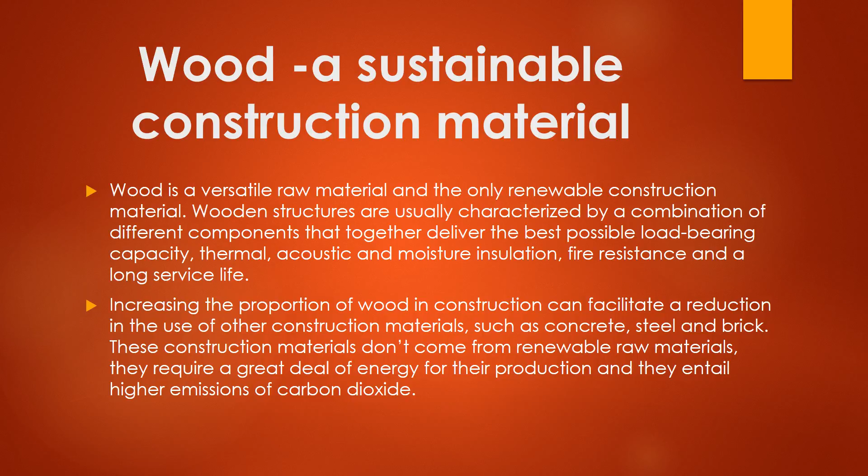Increasing the proportion of wood in construction can facilitate a reduction in the use of other construction materials such as concrete, steel, and brick. These construction materials don't come from renewable raw materials. They require a great deal of energy for their production, and they entail higher emissions of carbon dioxide.

Production of different construction materials. Manufacturing wood products requires the input of very little external energy over and above the energy from their own byproducts. 80% of the energy consumed by Sweden's sawmills derives from biofuels from their own production lines, such as bark and shavings, while 20% is electrical energy.

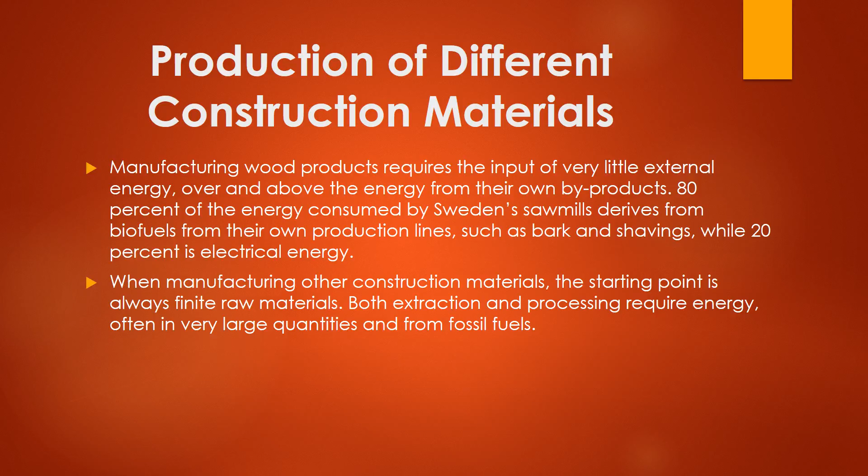When manufacturing other construction materials, the starting point is always finite raw materials. Both extraction and processing require energy, often in very large quantities and from fossil fuels. The manufacture of cement generates substantial carbon emissions, as do the processes for making steel. All the construction materials produced by these processes therefore have a positive carbon footprint.

This measure of a product's or activity's emissions of carbon dioxide and other greenhouse gases helps the user to opt for the alternative with the lowest impact on the climate. Wood is carbon negative since carbon dioxide is stored in the original wood, and the emissions associated with harvesting, transport, and processing are still small compared to the quantity of the stored carbon dioxide. And here's also a diagram showing the difference in the various materials.

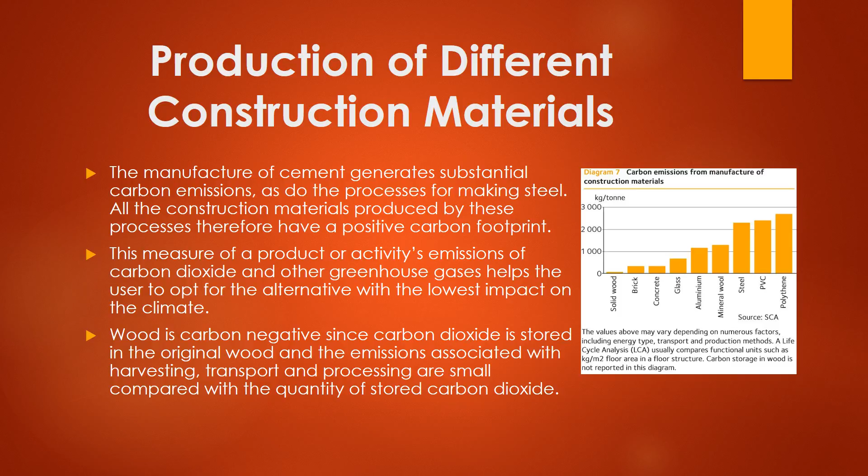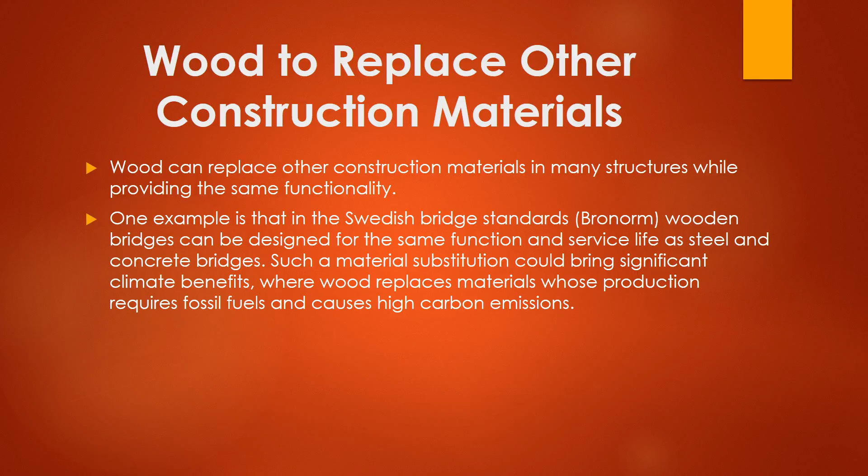Wood to replace other construction materials. Wood can replace other construction materials in many structures while providing the same functionality. One example is that in the Swedish bridge standards, Bronorm, wooden bridges can be designed for the same function and service life as steel and concrete bridges. Such a material substitution could bring significant climate benefits where wood replaces materials whose production requires fossil fuels and causes high carbon emissions.

Environmentally efficient life cycle and ecocycle. All construction materials except wood have a single ecocycle that involves reuse. For wood, there are two ecocycles, a shorter one that reuses the component or material, and a longer one that reuses the constituent parts of the wood material via nature's ecocycle.

We see examples of the shorter ecocycle in the construction industry and in distribution and packaging. Windows, doors, and timber can be reused, as can pallets, packaging, and cable drums. In all cases, there is an organization to deal with the products and find new users.

Once wood can no longer be reused or its material recovered for use in fiberboard and other sheet materials, for example, it can still generate energy through incineration. The energy is climate neutral and is in fact stored solar energy.

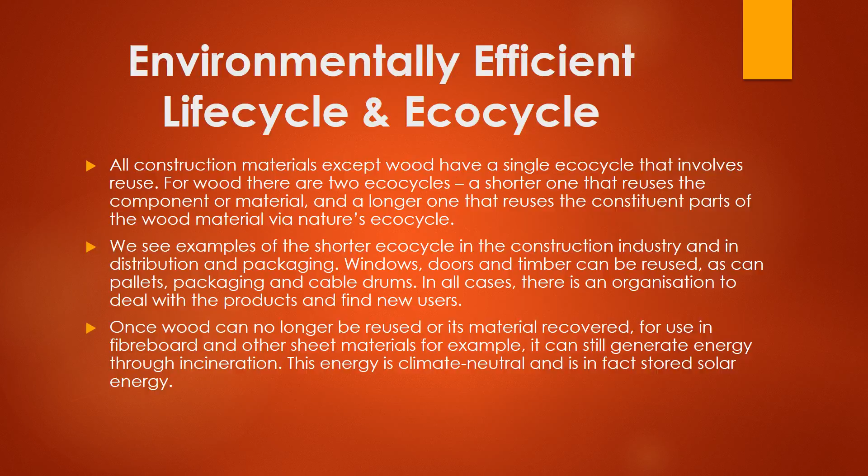Building with wood, it's positive for the climate. Achieving a climate neutral society depends on greater energy efficiency and a wider use of renewable energy sources. For the construction and real estate sector, this will have an impact on both the production and use phase. For new builds, this is about the choice of materials and having a construction process with a low environmental impact and an energy efficient building at the end of it.

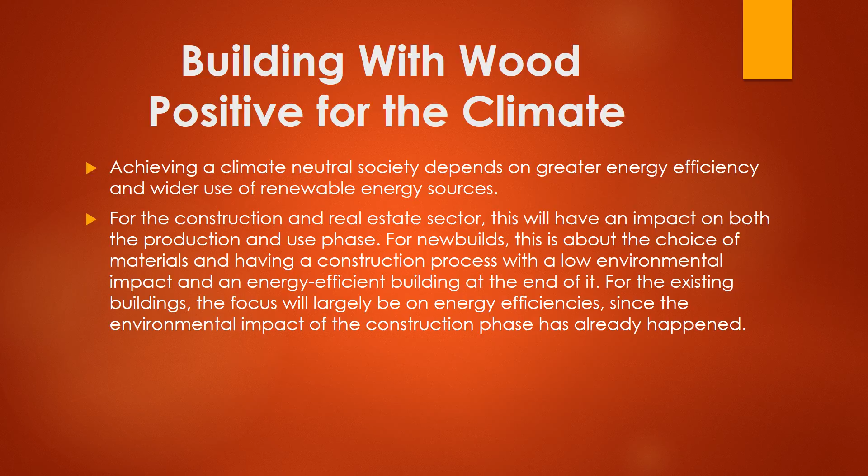For existing buildings, the focus will largely be on energy efficiency, since the environmental impact of the construction phase has already happened. Historically, a building's operational phase has accounted for the greatest energy consumption during the building's lifetime, and the production phase has been seen as almost negligible.

With the advent of new, increasingly stricter requirements concerning energy use in our buildings, and in an extreme case, zero energy buildings, energy use in the production phase will become increasingly important. Adapting material choices, designs, and production processes to the new conditions is a major challenge for the construction sector. Greater use of wood-based products and wooden structures is a significant part of the solution due to the material's carbon storage and substitution effects.

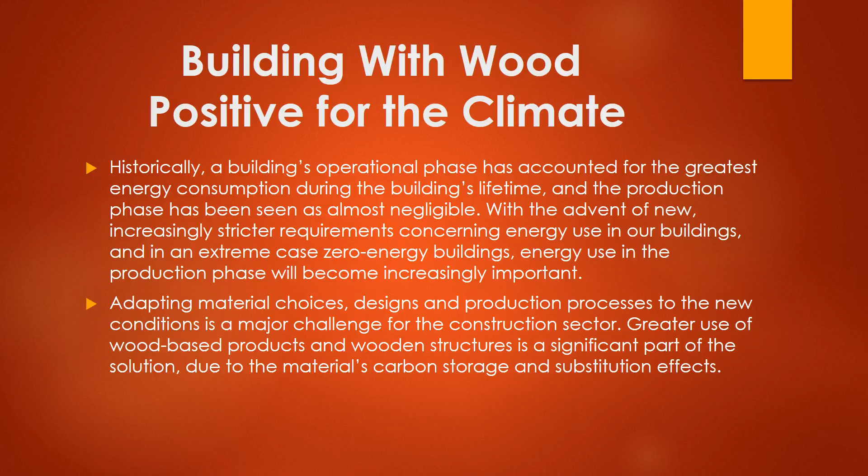Standards and environmental product declarations. New standards and documents are currently being drawn up as a means of assessing a building's environmental impact. The basis for all standards on the environment is ISO 9001 and ISO 14001. Then come the standards for life cycle analysis.

Product Category Rules, or PCR, set out how to draw up an environmental product declaration, and these are governed by SS-EN 15804 for building products. SS-EN 15978 specifies the calculation method based on a life cycle analysis that is used to assess the environmental performance of the whole building.

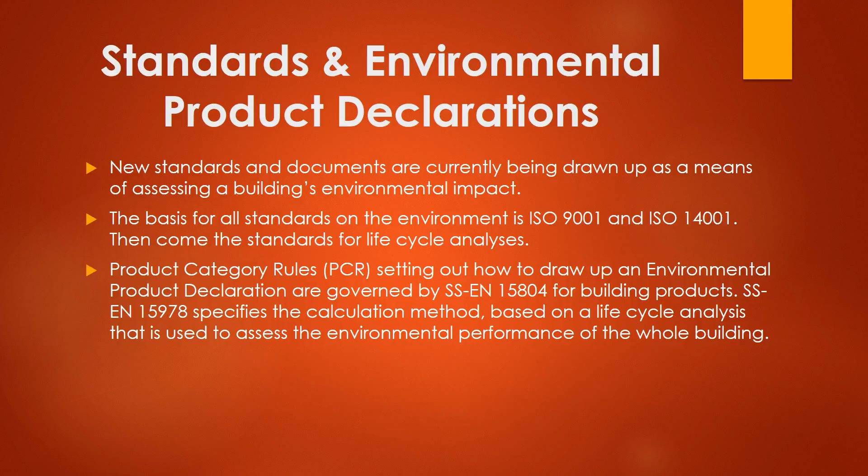Now we will talk about tree growth. Trees grow in height as a result of the meristems that are located at the branch tips. All buds that you see on a tree contain apical meristems.

Trunk diameter growth occurs as a result of another meristem, already mentioned, called the vascular cambium. A tree grows upward from the tips of the branches, downward from the roots, and outward from the trunk. The root anchors the tree to the ground, and the trunk gives support to the branches.

As a tree grows from the food it manufactures, it adds new layers of wood to its trunk. Because one is formed each year, these layers are called annual rings and may be used to tell the age of a tree.

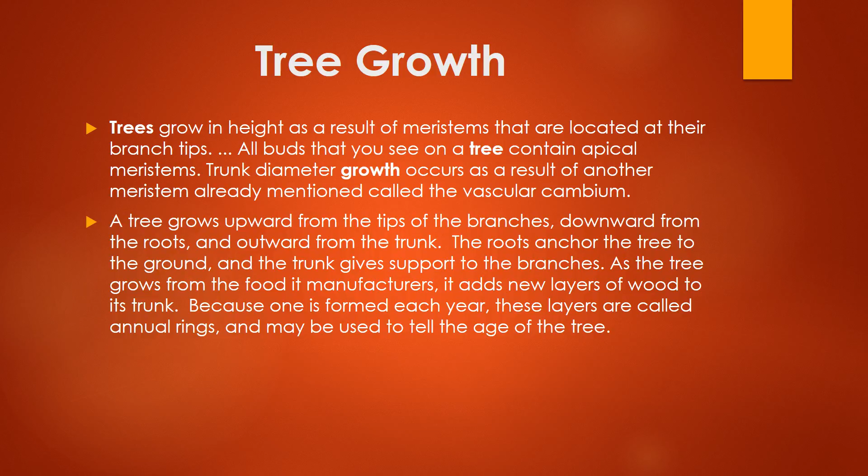The center of the stem is called the heartwood. This is composed of dead cells that give the tree strength to stand. The heartwood was once sapwood, but when new sapwood formed, the older died and formed the heartwood of the tree.

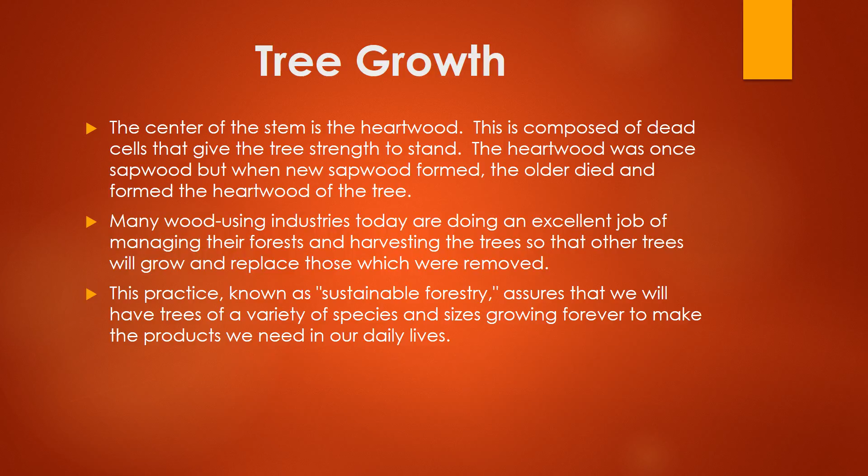Many wood-using industries today are doing an excellent job of managing their forests and harvesting the trees so that other trees will grow and replace those which were removed. This practice, known as sustainable forestry, assures that we will have trees of a variety of species and sizes growing forever to make these products we need in our daily lives.

Softwoods and hardwoods. All trees reproduce by producing seeds, but the seed structure varies. In general, hardwood comes from a deciduous tree which loses its leaves annually, and softwood comes from a conifer, which remains evergreen. Hardwoods tend to be slower growing and are therefore usually more dense. Hardwood is not necessarily a harder material, and softwood is not necessarily a softer material.

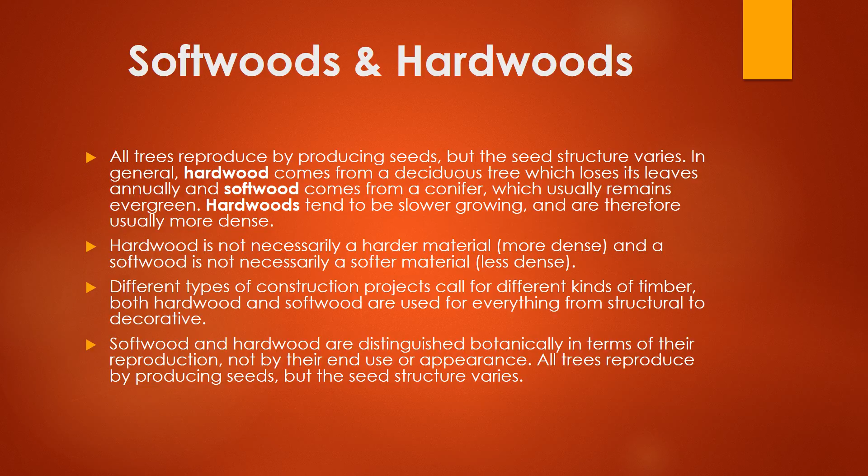Different types of construction projects call for different kinds of timber. Both hardwood and softwood are used for everything from structural to decorative. Softwood and hardwood are distinguished botanically in terms of their reproduction, not by their end use or appearance. All trees reproduce by producing seeds, but their seed structure varies.

Specifically, hardwood has vessel elements that transport water throughout the wood. Under a microscope, these elements appear as pores. Hardwood is more likely to be found in high-quality furniture, decks, flooring, and construction that needs to last. Types of hardwood are alder, balsa, beech, hickory, mahogany, maple, oak, teak, and walnut.

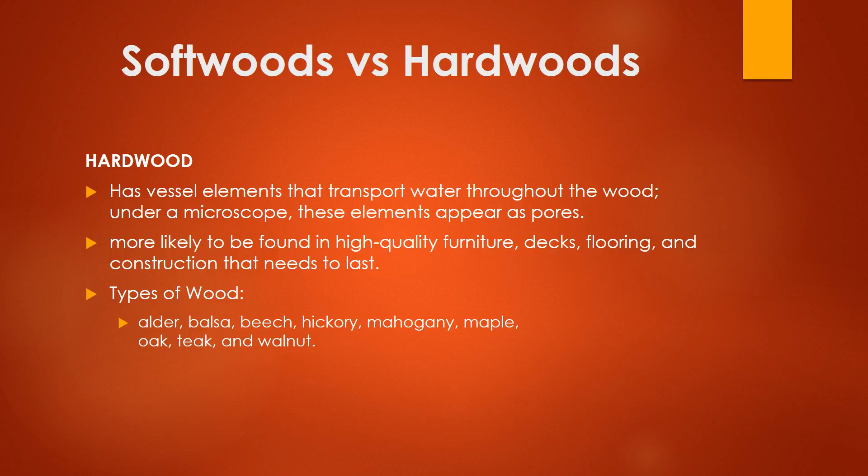More details on softwood. They usually have needles and cones. Medullary rays and tracheids transport water and produce sap. When viewed under a microscope, softwoods have no visible pores because of tracheids. About 80% of all timber comes from softwood.

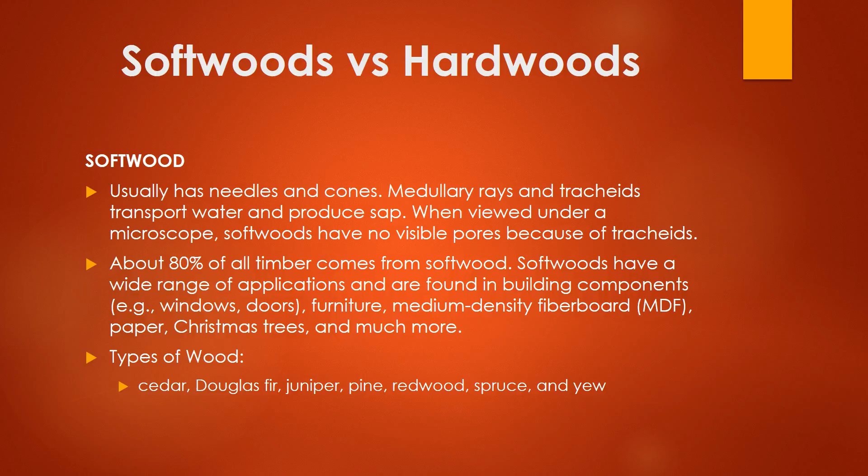Softwoods have a wide range of applications and are found in building components, for example, windows and doors, furniture, medium density fiberboard or MDF, paper, Christmas trees, and much more. Types of softwood are cedar, Douglas fir, juniper, pine, redwood, spruce, and yew.

Now we will talk about certified wood. Certified wood and paper products come from responsibly managed forests as defined by a particular standard. With third-party forest certification, an independent organization develops standards of good forest management, and independent auditors issue certificates to forest operations that comply with those standards.

Some certified wood requirements. Forest certification programs typically require that forest management practices conform to existing laws. Other basic requirements or characteristics of forest certification programs include the basic requirements of credible forest certification. Such items include protection of biodiversity, species at risk and wildlife habitat, sustainable harvest levels, protection of water quality, and prompt regeneration.

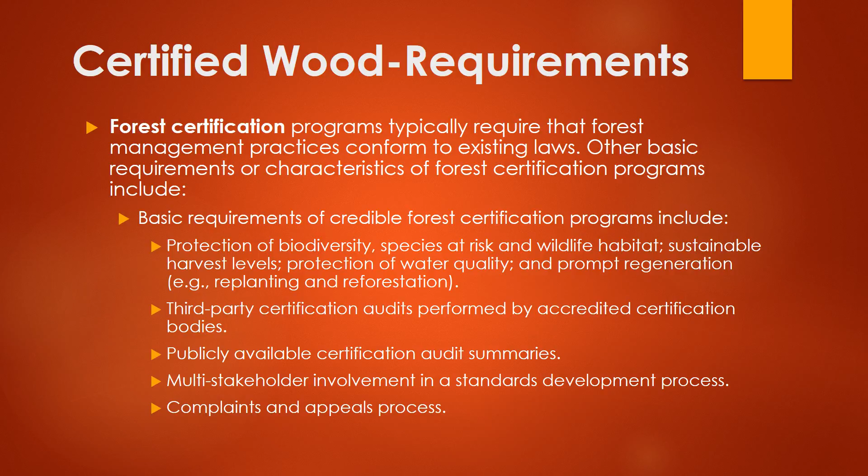There are third-party certification audits performed by accredited certification bodies, publicly available certification audit summaries, multi-stakeholder involvement in a standard development process, and there's also a complaints and appeal process.

Today, there are more than 50 certification programs worldwide addressing the many types of forest and tenures around the world. Two of the largest international forest certification programs are the Program for the Endorsement of Forest Certification, also known as PEFC. It is the largest certification framework in terms of forest area, with approximately two-thirds of the total certified area. And there's also the Forest Stewardship Council, or FSC, which is the fastest growing.

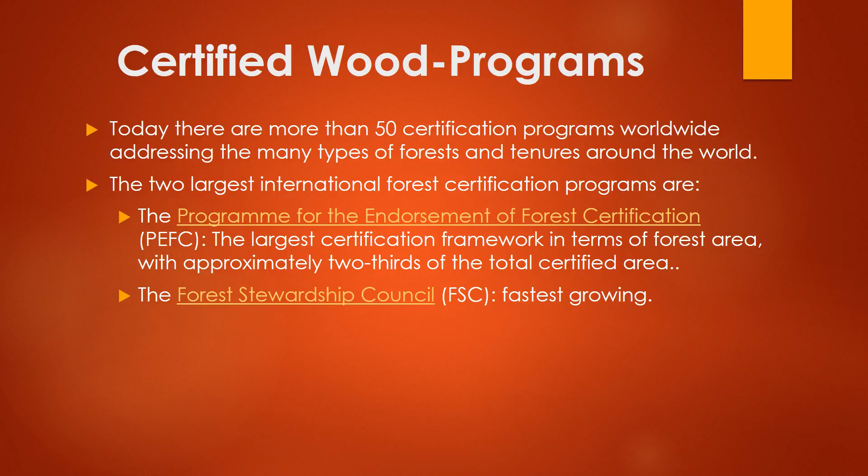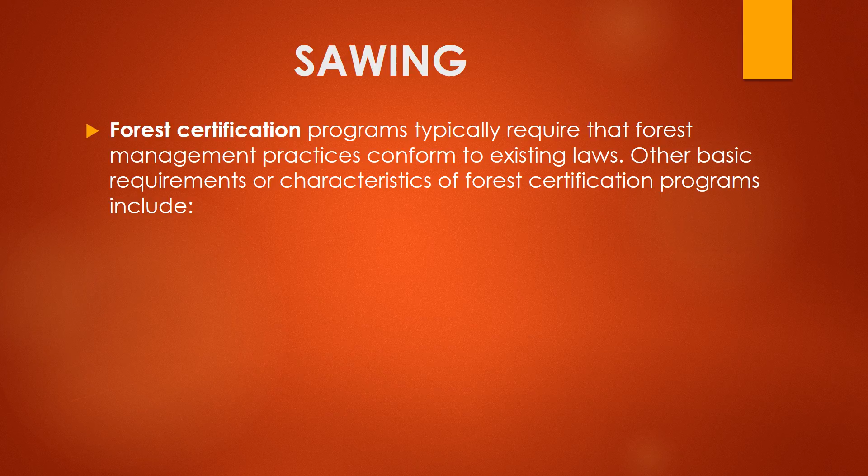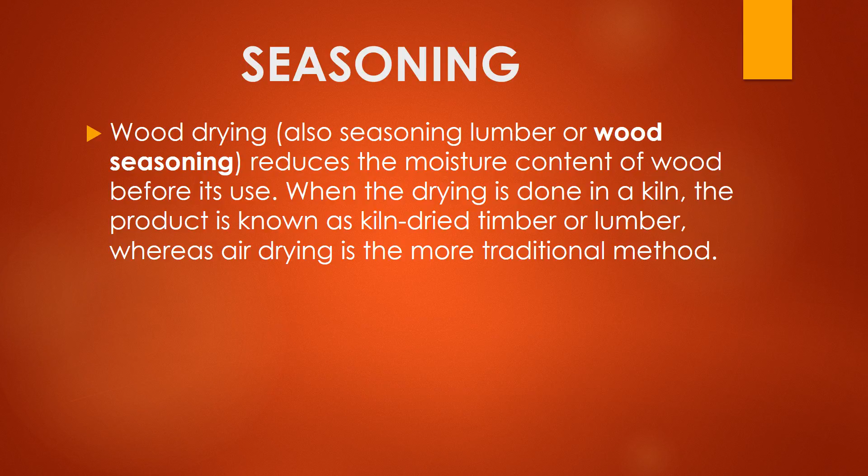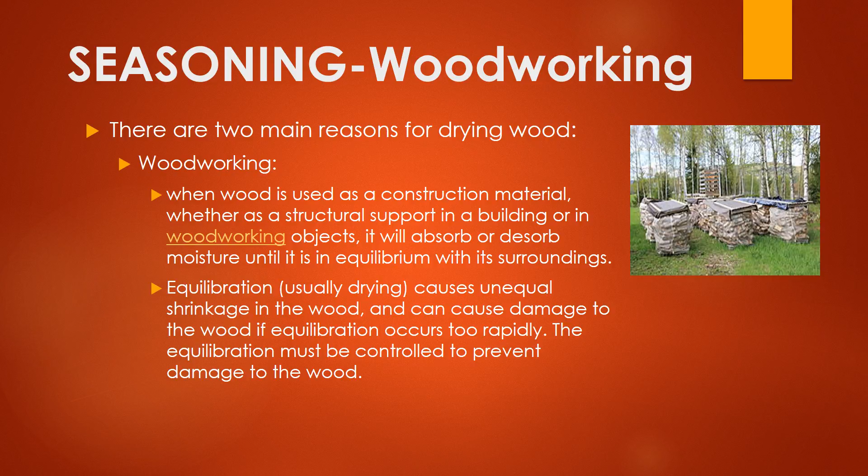Seasoning, when it is done in woodworking, there are two main reasons for drying wood. First is woodworking. When wood is used as a construction material, whether as a structural support in a building or in woodworking objects, it will absorb or desorb moisture until it is in equilibrium with its surroundings. Equilibration usually causes unequal shrinkage in the wood and can cause damage if equilibration occurs too rapidly. The process must be controlled to prevent damage to the wood.

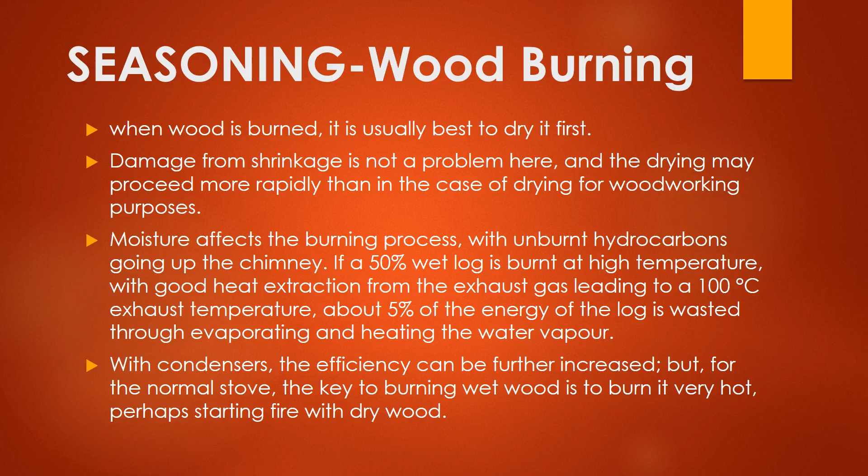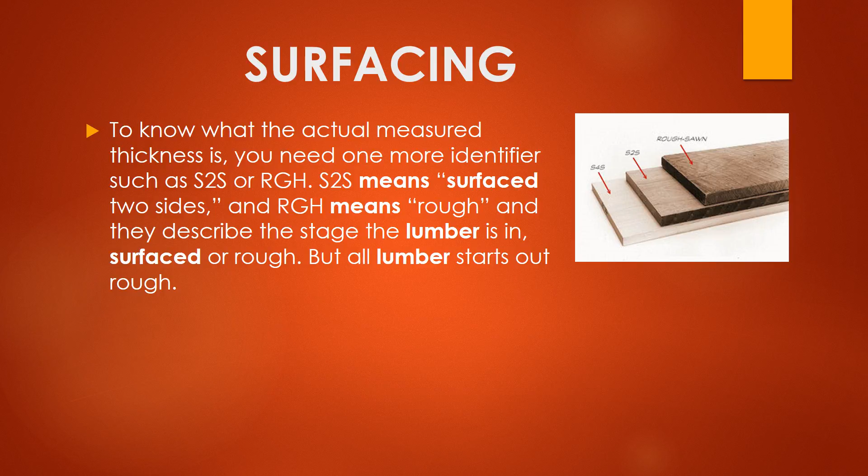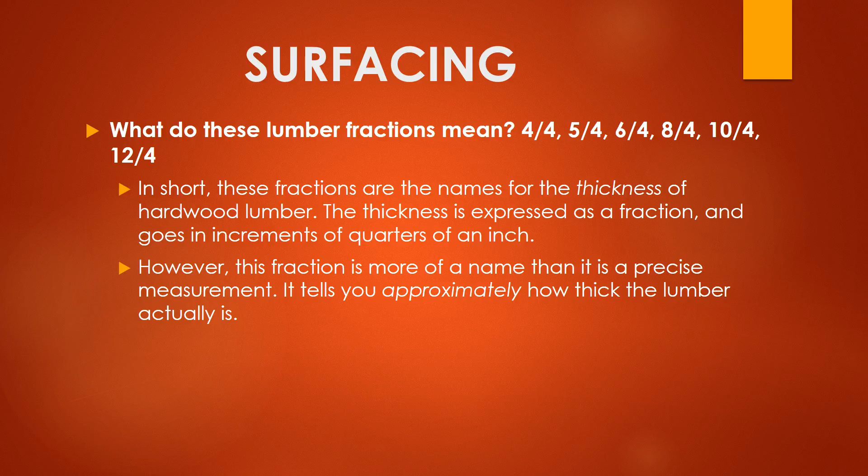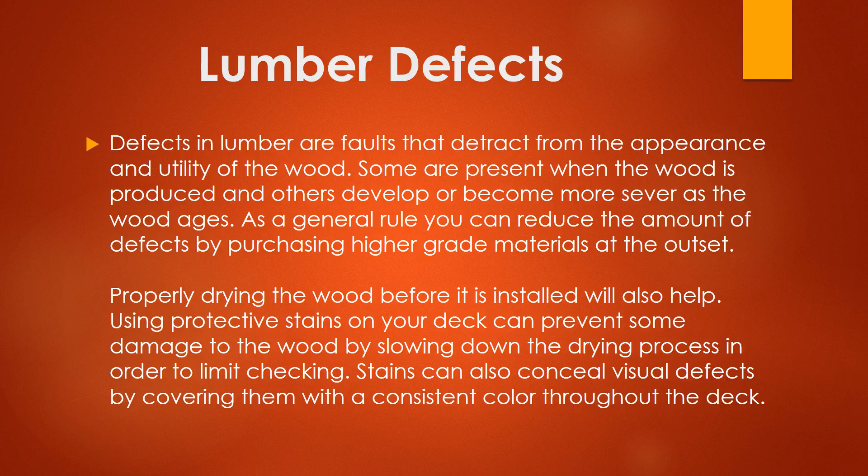Check: a check is a term used to describe a crack that runs through a board, usually lengthwise. It is usually caused when lumber dries too quickly. Adding a UV protective stain can help protect decking and rails. Checking often affects pressure-treated framing materials, as they are usually sold very green and put under a lot of stress as they dry out in the sun.

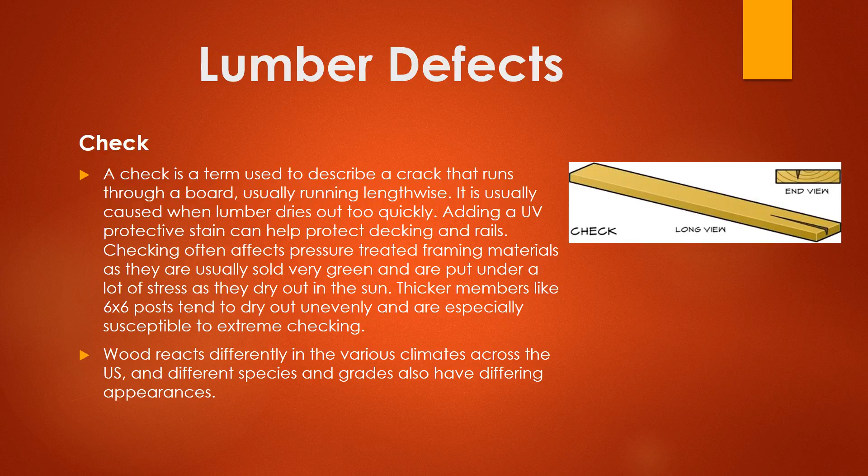Thicker members like 6x6 posts tend to dry out unevenly and are especially susceptible to extreme checking. Wood reacts differently in various climates across the U.S., and different species and grades also have differing appearances. Exterior environments have fluctuating moisture content in the air and materials; whether in a dry or wet climate, there will still be annual variation.

With a typically large cross-section of posts, commonly 4x4 or 6x6, the lumber does not dry uniformly. As the wood dries, it shrinks, and shrinking often causes existing cracks to open or twisting to occur. This is normal and structurally acceptable in most cases.

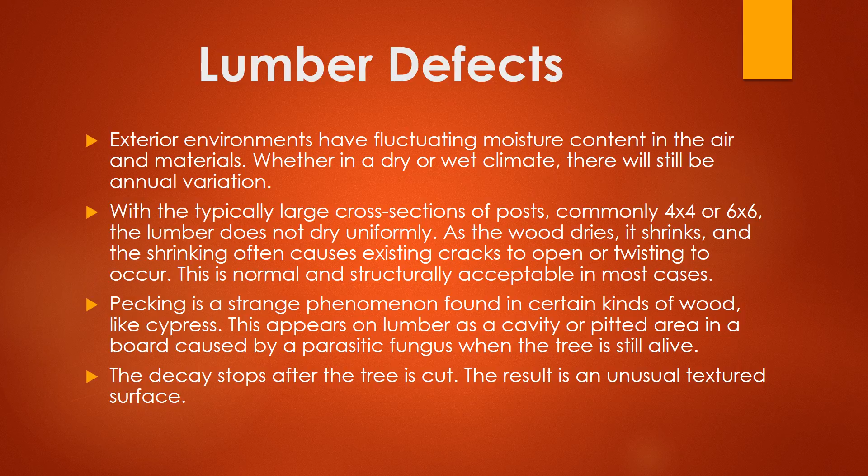Pecking is a strange phenomenon found in certain woods, like cypress. This appears on lumber as a cavity or pitted area in a board, caused by a parasitic fungus when the tree is still alive. The decay stops after the tree is cut, and the result is an unusual textured surface.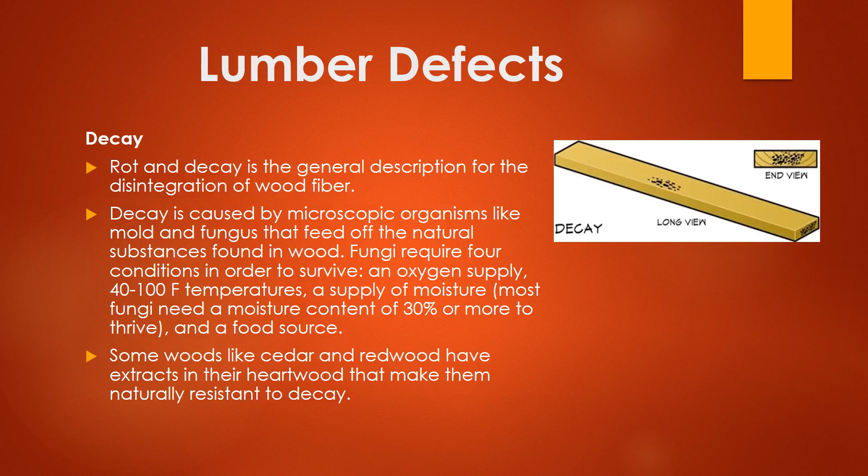A little more on decay: rot and decay is a general description for the disintegration of wood fiber. It's caused by microscopic organisms like mold and fungus that feed off natural substances found in wood. Fungi require four conditions to survive: an oxygen supply, 40 to 100 degree Fahrenheit temperatures, a supply of moisture — most fungi need moisture content of 30% or more to thrive — and a food source. Some woods, like cedar and redwood, have extracts in their heartwood that make them naturally resistant to decay.

We will talk more on shake now. Ring shake is caused by a parasitic bacteria that weakens the wood, resulting in cracking between and parallel to the tree's growth rings, and results in lower strength.

This is much like a large straw with a small straw inside of it. If it is stood upright, it can fall out of the bottom.

Ring shake can also cause a dark discoloration and unpleasant vinegar or rancid odor. This defect usually occurs in wood with high moisture content. It takes a long time for shake to spread, so it is usually found only in the lower part of the trees and can be cut out.

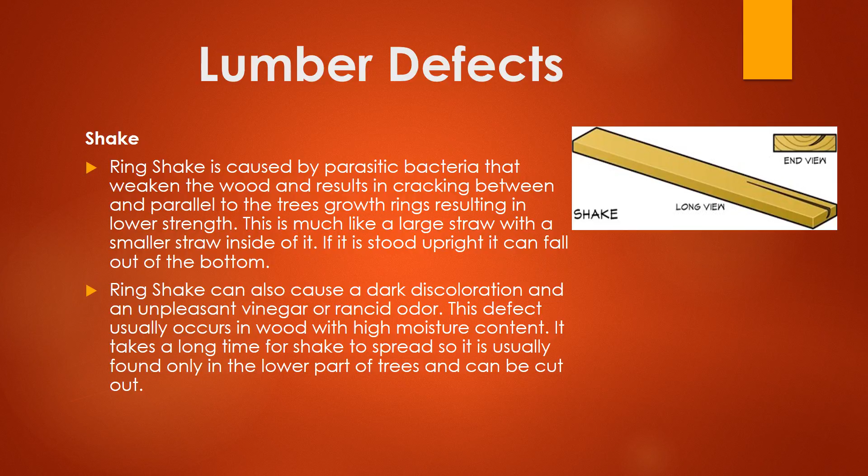Pitch pocket. These conditions are seen as a pocket of bleeding, resinous material found on a board and occur when a tree is injured. It sometimes happens when a feeding insect damages the living part of the bark. Resin or sap can stain lumber and may cause difficulty when applying finishes.

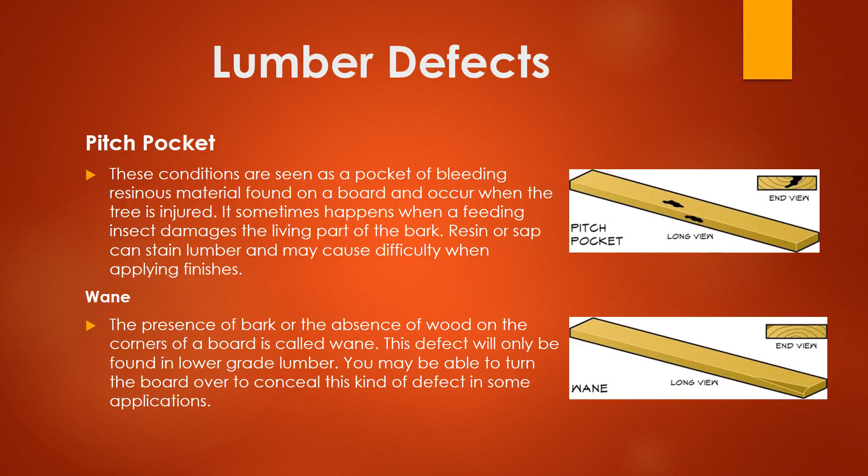Another defect is wane. This is the presence of bark or the absence of wood on the corners of a board. This defect will only be found in lower grade lumber. You may be able to turn the board over to conceal this kind of defect in some applications.

Another one is crook, or also known as crown, and it is a defect found in a board that is bent end to end in the direction of the tall ends of the board as it continues down the length of the board. It can occur from uneven drying or if the tree's pith, which is a soft core at the center of a tree, is at the edge of the board.

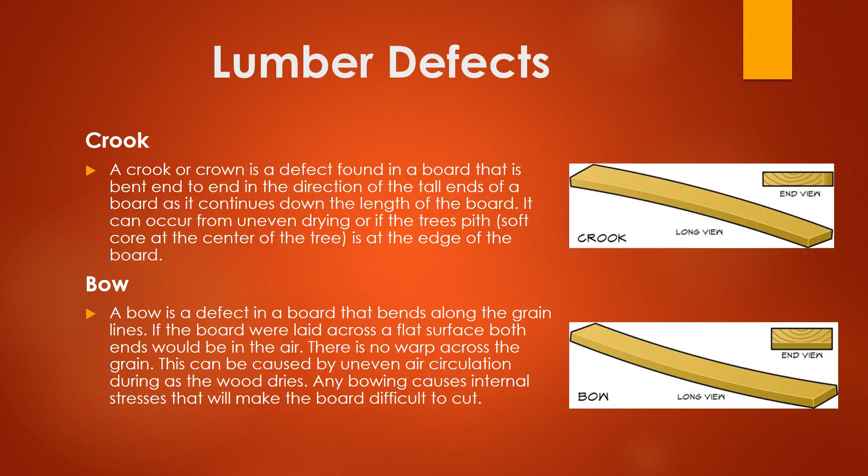Another defect is bow. A bow is a defect in the board that bends along the grain lines. If the board were laid across a flat surface with ends in it, both ends would be in the air. There is no warp across the grain. This can be caused by uneven air circulation as the wood dries. Any bowing causes internal stresses that will make the board difficult to cut.

Cup. Cupping occurs when the board bends edge to edge across the face of the board and where the ends of the boards look like the letter U. It is common in boards that are cut close to the pith.

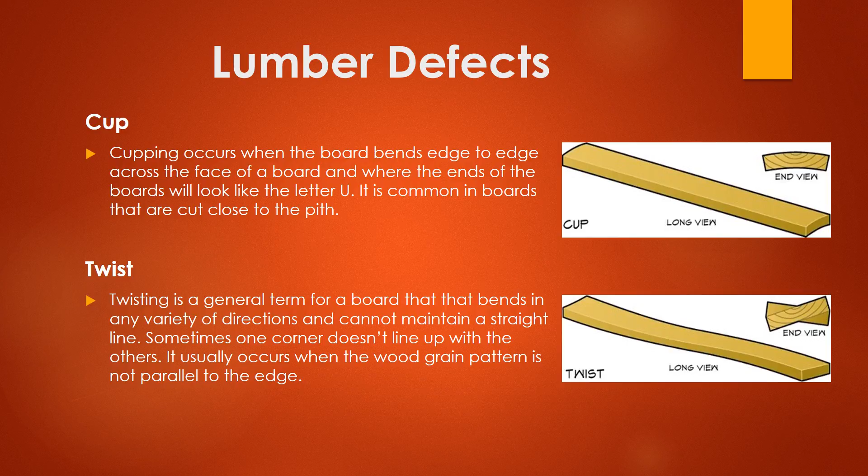Twist. Twisting is a general term for a board that bends in any variety of directions and cannot maintain a straight line. Sometimes one corner doesn't line up with others. It usually occurs when the wood grain pattern is not parallel to the edge.

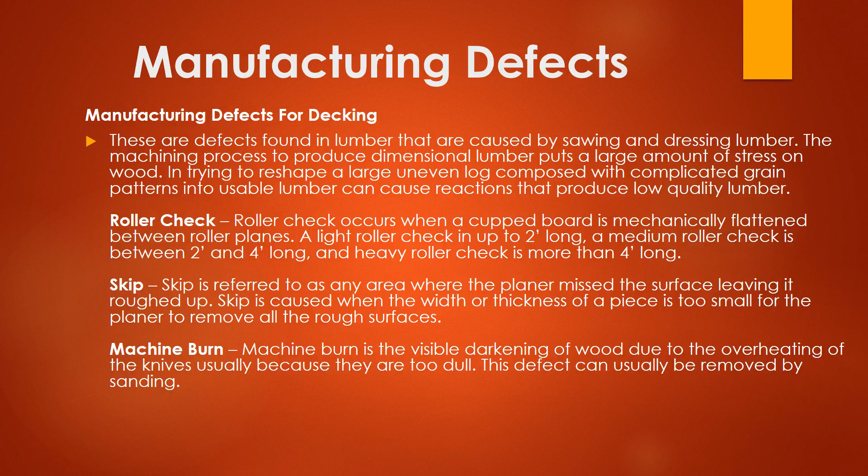Also, we have manufacturing defects for decking. These are defects found in lumber that are caused by sawing and dressing lumber. The machining process to produce dimensional lumber puts a large amount of stress on wood. Trying to reshape a large, uneven log composed of complicated grain patterns into usable lumber can cause reactions that produce lower quality timber. A couple things that apply to this are roller check, skip, and machine burn.

We will now talk about lumber grading, a general guide to basic wood. The two main classifications of lumber are select lumber and common lumber. Select lumber is considered the finest and best for use in finishing projects. Common lumber is best for general building and construction.

Select lumber classifications: there are natural finishes, graded either A or B. A is nearly free of all defects and blemishes. B contains a few minor blemishes. Painted finishes are graded either C or D. Grade C contains more significant blemishes and more of them than woods in grade B. Grade D has even more blemishes than grade C does. Either grade C or D presents a satisfactory appearance when painted.

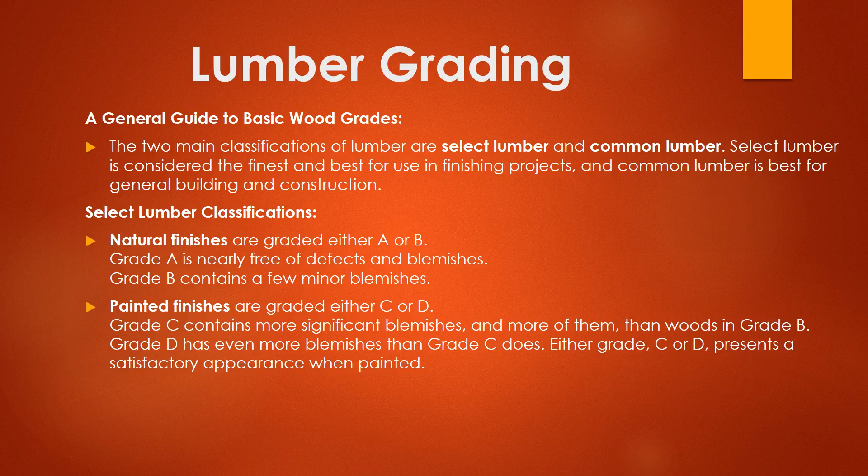Common lumber classifications: there's a number 1, which is for construction use, and is sound, tight knotted stock containing only a few minor defects. It has no knotholes or other serious defects. It may be suitable for use as grain-tight lumber used for siding, cornices, shelving, paneling, and some furniture.

There's number 2, which is standard use, and this grade has more and larger knots and blemishes than number 1. Number 3 is utility use and contains a few defects larger and coarser than those in number 2. Number 4 is a low quality material, contains serious defects like knotholes, checks, shakes, and decay.

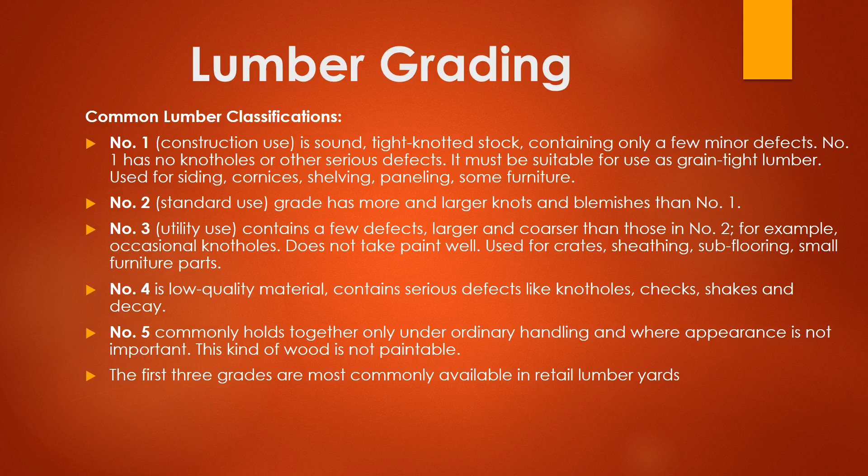Number 5 commonly holds together only under ordinary handling and where appearance is not important. This kind of wood is not paintable. The first three grades, 1, 2, and 3, are commonly available in retail lumber yards.

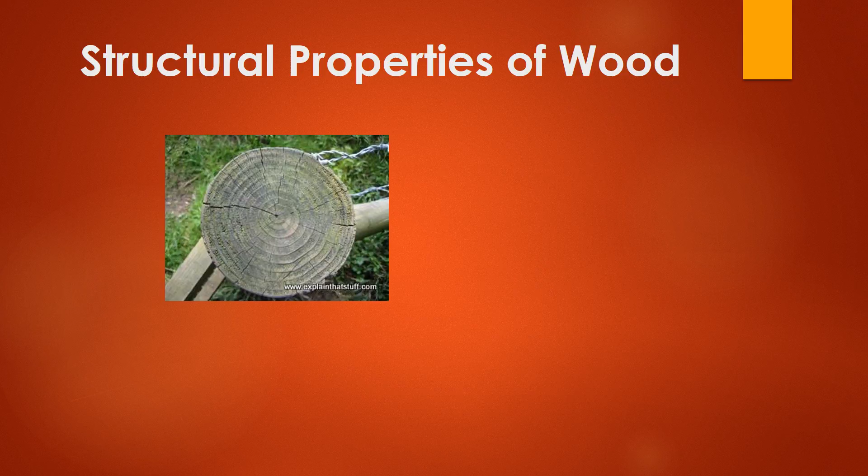This is a picture of a structural property of wood where you see a lot of cracking, and the structure is in question.

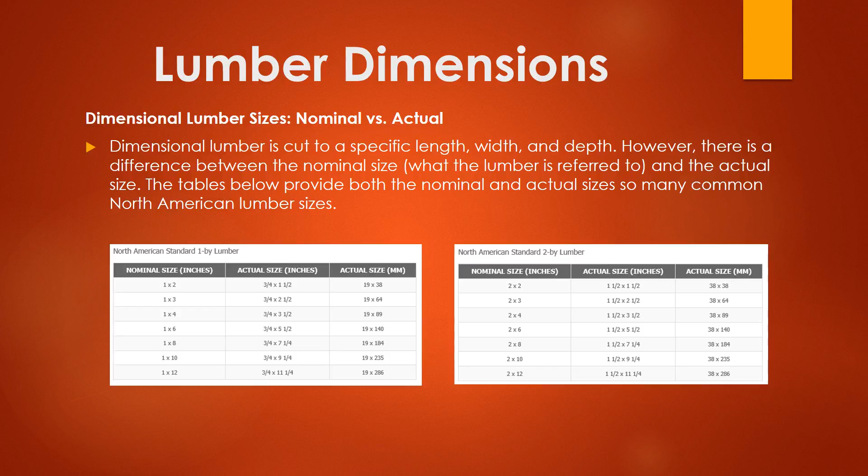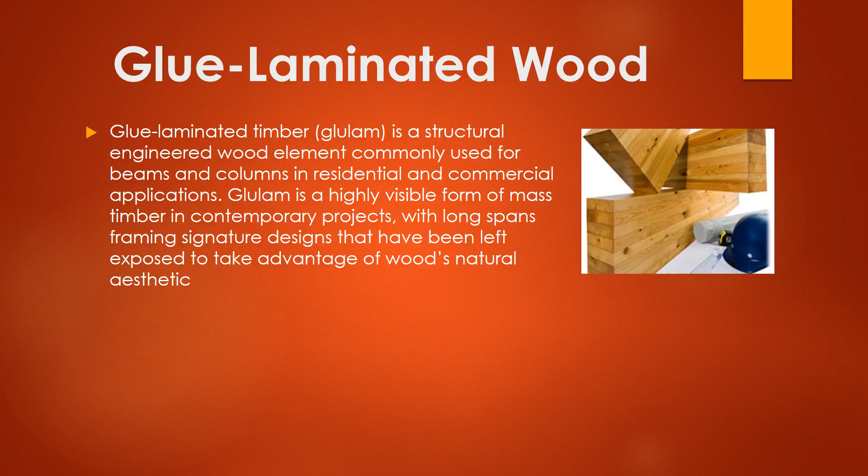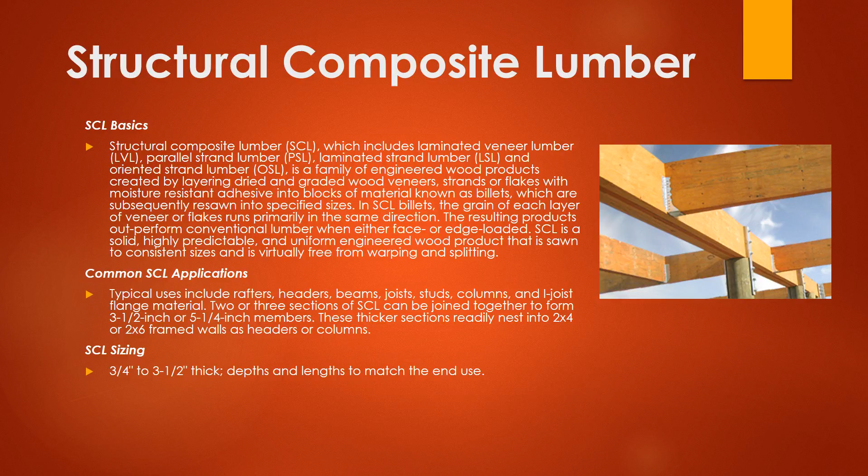Common SCL applications. Typical uses include rafters, headers, beams, joists, studs, columns, and I-joist flange material. 2 or 3 sections of SCL can be joined together to form 3 1/2 inch or 5 1/4 inch members. These thicker sections readily nest into 2x4 or 2x6 framed walls as headers and columns. SCL sizing: 3/4 inch to 3 1/2 inch thick, depths and lengths to match the end use.

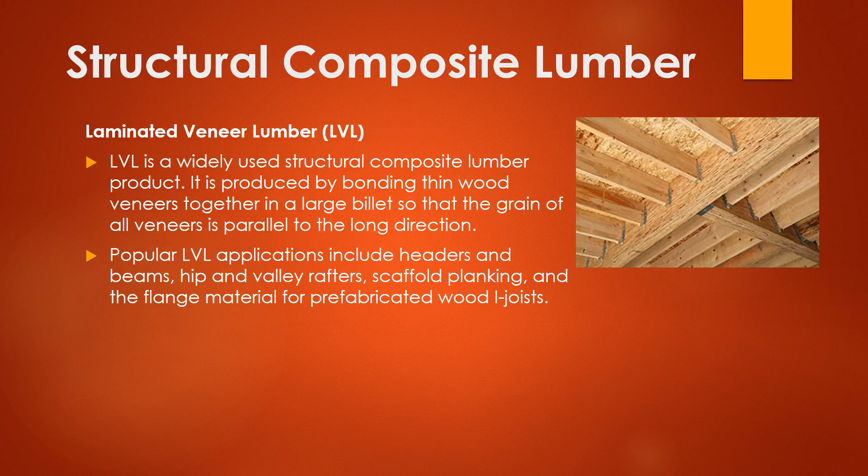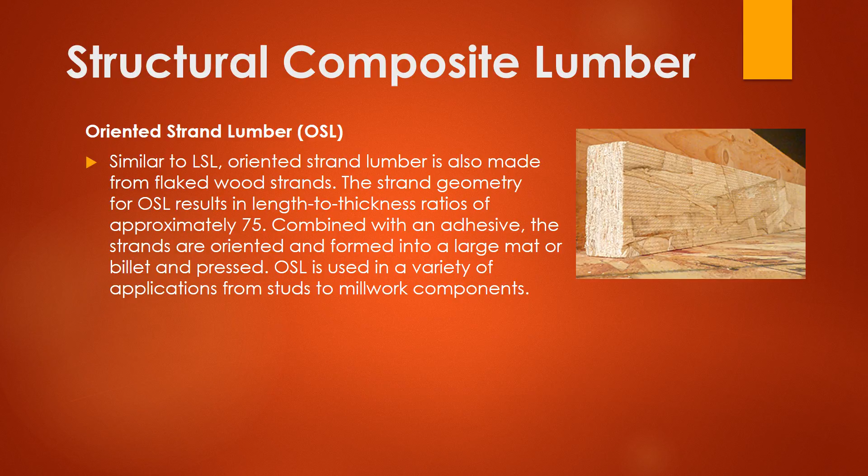Oriented strand lumber is another one. Similar to LSL, oriented strand lumber is made from flaked wood strands. The strand geometry for OSL results in length to thickness ratios of approximately 75. Combined with an adhesive, the strands are oriented and formed into a large mat or billet and pressed. OSL is used for a variety of applications from studs to millwork components.

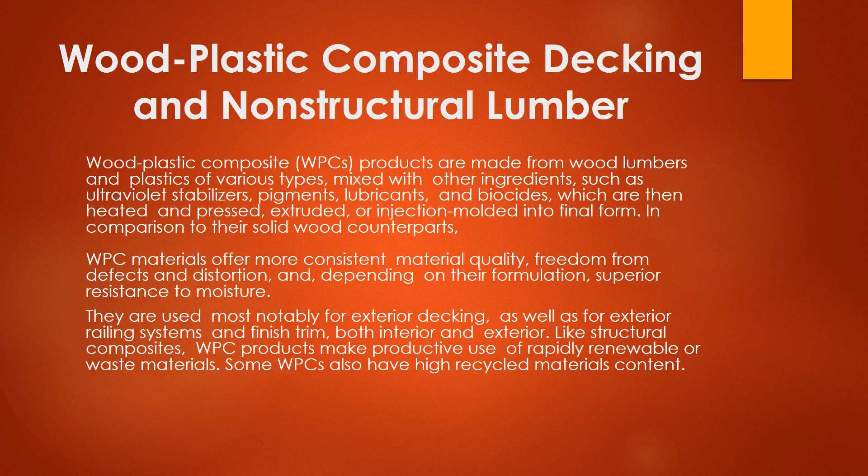They are used most notably for exterior decking as well as exterior railing systems and finish trim, both interior and exterior. Like structural composites, WPC products make productive use of rapidly renewable or waste materials. Some WPCs have high recycled materials content.

Another item is plastic lumber. Plastic lumber, known as PL, is a plastic form of lumber made from virgin or recycled plastic. It is made of 100% plastic compared with wood plastic composite lumber. Widely employed in outdoor decking, it can also be used for molding and trim and garden furniture such as park benches. Resistant to cracking and splitting when appropriately installed, plastic lumber can be molded with or without simulated wood grain details. Even with a wood grain design, PL is still easy to distinguish visually from natural timber. The grains are the same uniform colors as the rest of the material.

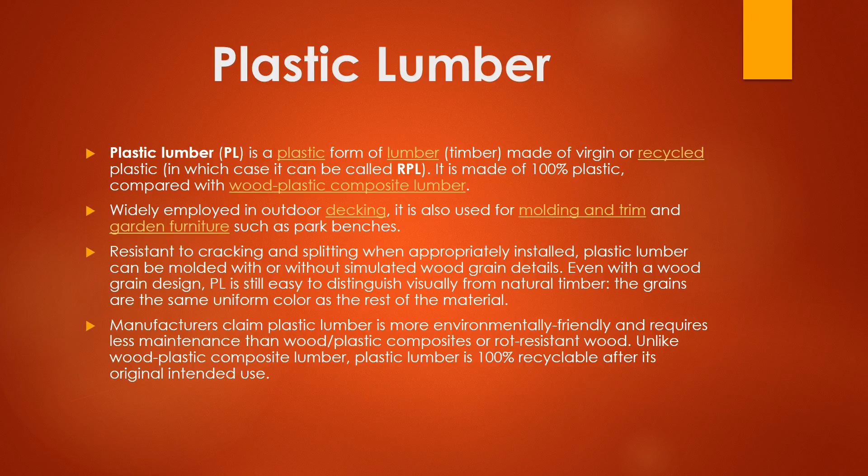Manufacturers claim plastic lumber is more environmentally friendly and requires less maintenance than wood plastic composites or rot-resistant wood. Unlike wood plastic composite lumber, plastic lumber is 100% recyclable after its original intended use.

Wood panel products. Wood panel products are flat, sometimes curved, sheets made from wood-based materials that are bonded together with an adhesive. Panels are typically of veneer, strands, particles, or fibers that are bonded with a synthetic or other adhesive cured using heat and pressure. The properties of the panel products are a result of the character of the wood raw material, the adhesive, additives, and the details of the manufacturing process. The most commonly produced wood panel products are plywood, oriented strand board, particle board, and fiberboard.

Other wood-based composite materials may be produced in panel form for specialized applications and markets. Wood panels may be categorized as structural or non-structural. Structural panels are designed and manufactured to resist forces and play specific roles in structural systems such as houses, buildings, concrete formwork, shipping containers, and unit load platforms. Mechanical properties are principal design criteria for these products.

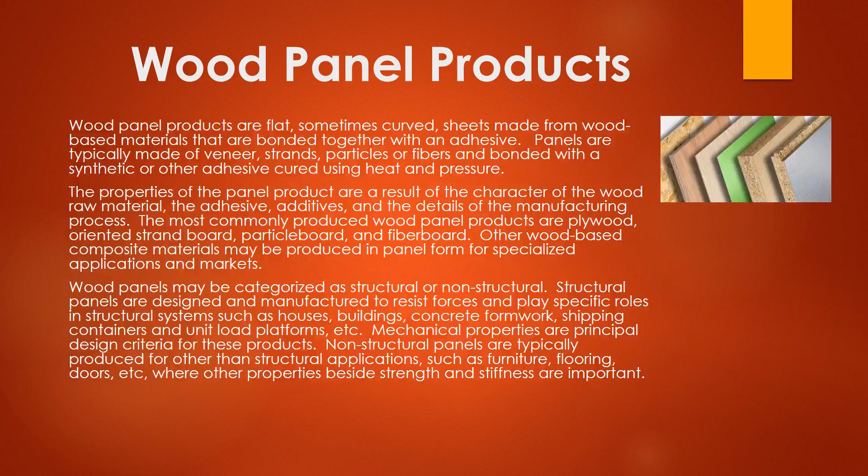Non-structural panels are typically produced for other than structural applications such as furniture, flooring, and doors, and where other properties besides strength and stiffness are important. A little more detail on wood panel products. Specifically, we have plywood, and it is a panel product made by gluing individual plies or thin layers of veneer together. The veneer is a thin sheet of wood that has been mechanically peeled from a log on a lathe in a fashion similar to unrolling toilet paper. Plywood is made from both hardwood and softwood species and may be bonded with many types of adhesive.

Oriented strand board, or OSB, or wafer board is comprised of thin wood strands or flakes that are sprayed with resin and wax, formed into a mat that is pressed under heat. Individual flakes and layers of flakes are oriented in different directions in the lay-up process to achieve desired properties, hence the name. OSB panels are used much like plywood as a sheathing material, and OSB is seen as a lower cost substitute in many applications and markets.

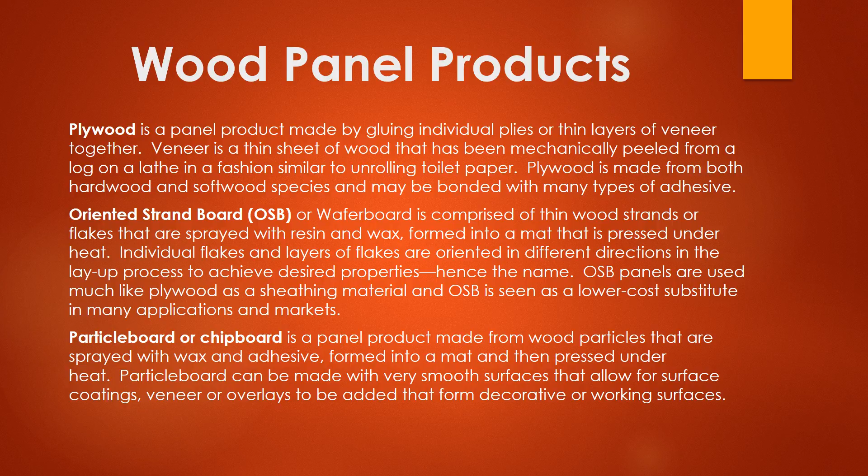Particle or chipboard is a panel product made from wood particles that are sprayed with wax and adhesive, formed into a mat and then pressed under heat. Particle board can be made with very smooth surfaces that allow surface coatings, veneer, overlay to be added that form decorative or working surfaces.

We'll now talk about wood chemical treatments. Wood preservative products are those that claim to control wood degradation problems due to fungal rot or decay, sap stain, molds, or wood-destroying insects. Both the treatment process and the use of the treated products can result in exposure to pesticides for both people and the environment. Most of the treatment processes and uses of treated products occur outdoors. There are wood preservatives that support a tolerance for indirect food contact uses such as wooden crates, pallets, and stakes used to store or grow raw agricultural commodities.

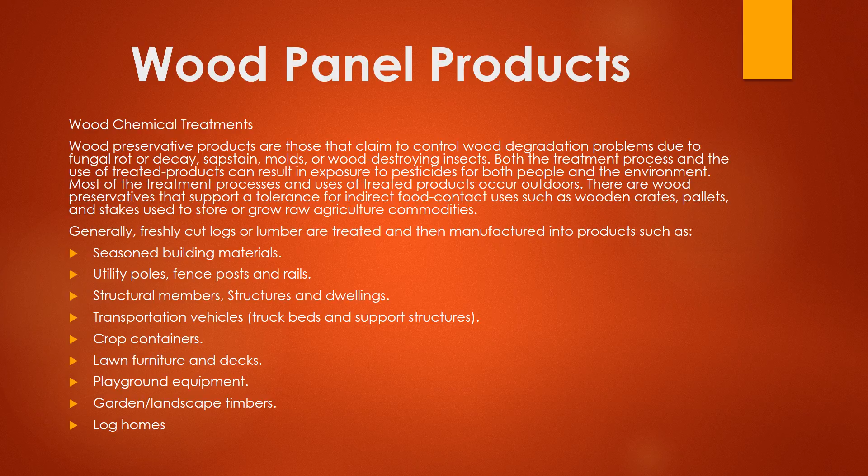Generally, fresh-cut logs or lumber are treated and then manufactured into products such as seasoned building materials, utility poles, fence posts and rails, structural members, structures and dwellings, transportation vehicles, crop containers, lawn furniture and decks, playground equipment, garden landscape timbers, log homes.

Manufactured wood components. Engineered wood, also called composite wood, man-made wood, or manufactured board, includes a range of derivative wood products which are manufactured by binding or fixing the strands, particles, fibers, or veneers or boards of wood together with adhesives or other methods of fixation to form composite materials. Engineered wood products are used in a variety of ways, often in applications similar to solid wood products. Engineered wood products may be preferred over solid wood in some applications due to certain comparative advantages.

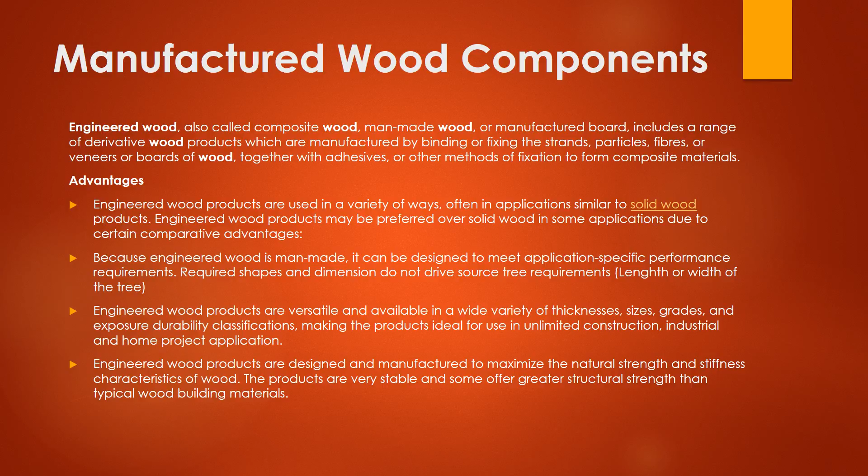Because engineered wood is man-made, it can be designed to meet application-specific performance requirements. Engineered wood products are versatile and available in a wide variety of thicknesses, sizes, grades, exposure durability classifications, making the products ideal for use in unlimited construction, industrial, and home project applications. Engineered wood products are designed and manufactured to maximize the natural strength and stiffness characteristics of wood. These products are very stable, and some offer greater structural strength than typical wood building materials.

Glued laminated timber has greater strength and stiffness than comparable dimension lumber, and pound for pound is stronger than steel. Some engineered wood products offer more design options without sacrificing structural requirements. Engineered wood panels are easy to work with using ordinary tools and basic skills. They can be cut, drilled, routed, jointed, glued, and fastened. Plywood can be bent to form curved surfaces without loss of strength, and large panel size speeds construction by reducing the number of pieces to be handled and installed.

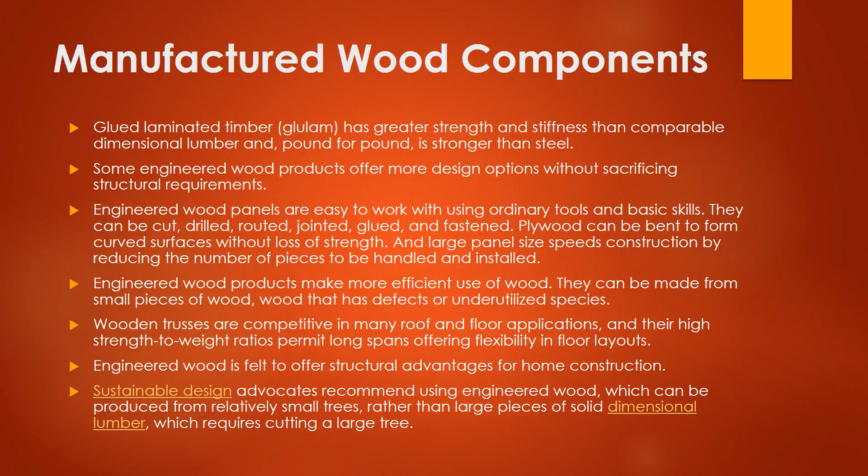Engineered wood products make more efficient use of the wood. They can be made from small pieces of wood, wood that has defects, or underutilized species. Wood trusses are competitive in many roof and floor applications, and their high strength-to-weight ratios permit long spans, offering flexibility in floor layouts. Additionally, engineered wood is felt to offer structural advantages for home construction. Sustainable design advocates recommend using engineered wood, which can be produced from relatively small trees rather than solid dimensional lumber, which requires cutting a large tree. And here is a list of references.